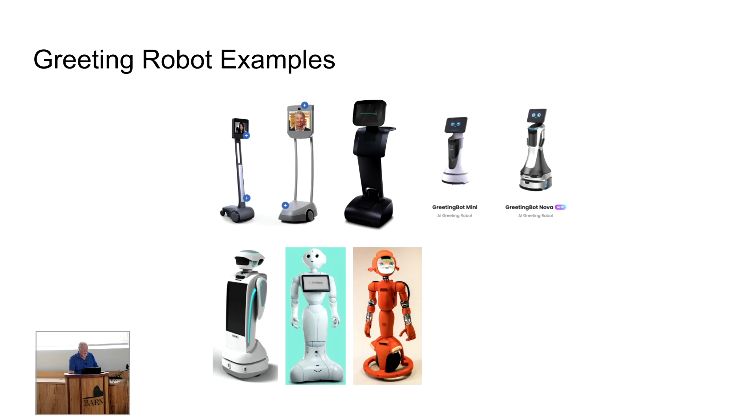Just to give you the feel, I have some videos, hopefully the audio works. I kept talking about this Texas project - let me scroll to the right place. Let's see if this works.

Multi-step task execution with fluent, human-like conversation. Our framework consists of a single AI agent derived from GPT-4, which is responsible for both natural...

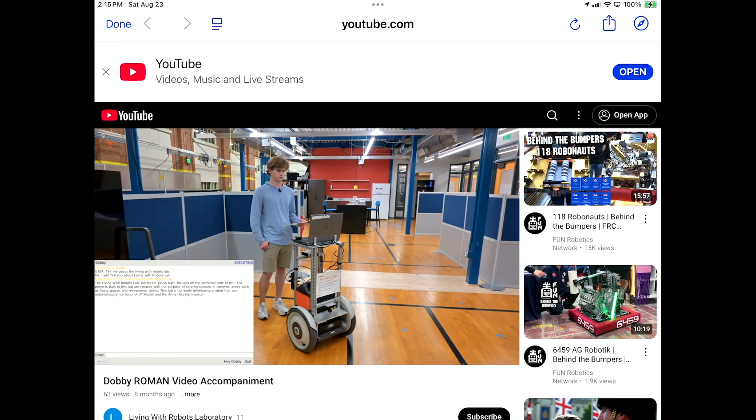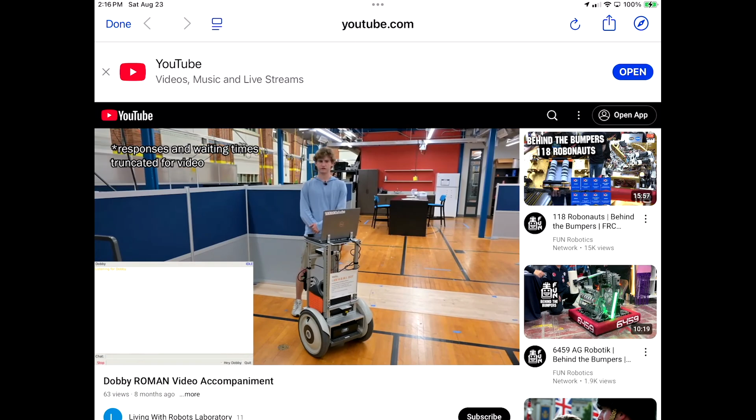People building robotics compete to see who has the better technology. You can imagine Amazon wanted robots to man their warehouses - able to go find, say, a fuzzy red doll for someone, put it in a bin, and bring it up so it can be shipped off. They set up a combination of cubicles with various objects, where the robot knew ahead of time what the objects were and how to grasp individual objects, but didn't know where they were located or where it had to put them.

So they would come into the contest and it says, okay, I want you to get these 5 items, put 2 of them in this bin and 3 of them in this bin over here. And they were timed. How fast can you complete this task?

So that was RoboCup. Then they came up with, and they said, that's interesting for industry and everything else. Then they came up with RoboCup at Home, which is the one that Connor mentioned, and the one that Justin Hart's students are most interested in. And these are doing things in the home.

Like they want to be able to say, a robot walks up to the front door of your house, and you're going to say, make me a cup of coffee, right? So it's got to figure out, a cup of coffee, got to find the kitchen, got to find coffee, got to find the coffee cup, got to find the coffee maker, got to make coffee.

Yeah, sight unseen, never seen your house. So this is where I come from. Connie, kids, everyone, I say, I want a robot. I can say, make me a drink, make me a gin and tonic. And it figures that out, figures out what the gin is, figures out the tonic, glass, ice, the whole thing, and brings it to me as well. That's my ultimate goal to get there.

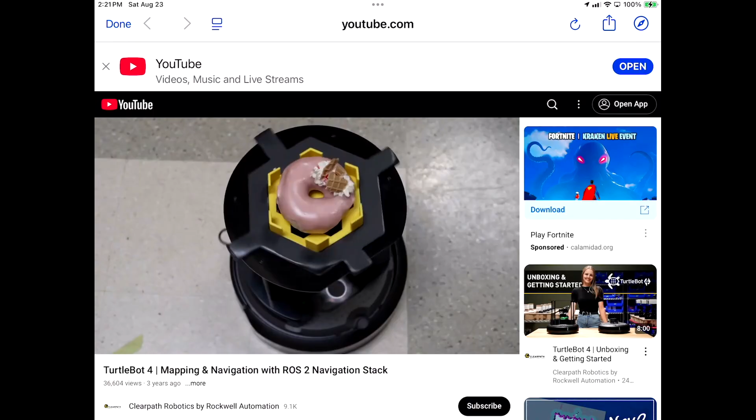So before we begin, if you're new to TurtleBot 4, make sure to check out our previous tutorial and we'll walk you through all the steps to get set up with your new robot. Otherwise, today we are using our TurtleBot 4 standard model as it's got this mounting platform.

For which we've designed TurtleBot 4. Make sure to check out our previous tutorial, which will walk you through all the steps to get set up with your new robot. Today we 3D printed a donut holder device that snaps right onto the top.

If you are looking for the design files for this, they will be linked in the description below. We've also got a computer running a Linux environment, as well as a package of a half dozen donuts from our favorite local donut shop, Lady Glaze.

Now that our robot's turned on, we're going to launch our SLAM toolbox, and we'll do that by opening a new terminal and running this line of code.

SLAM will allow our robot to create a map as well as localize itself within a map at the same time. There are two different kinds of SLAM supported by the TurtleBot 4: synchronous and asynchronous. Today we're using synchronous SLAM, which uses a bit more processing power, but helps create a better quality map overall.

After we've launched SLAM, we're going to open another new terminal and enter this line of code to launch RViz. RViz is a program that will allow us to view our robot as well as its location on our map when we're both generating the map and navigating today.

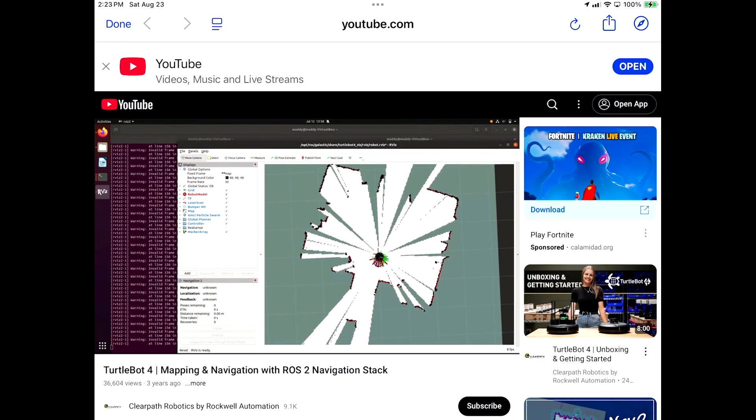Now we need to create a map of our environment for our TurtleBot 4 to navigate. To generate your map, you will need to place your TurtleBot on the ground and use your controller to drive it through your environment. You can monitor its completion by using RViz.

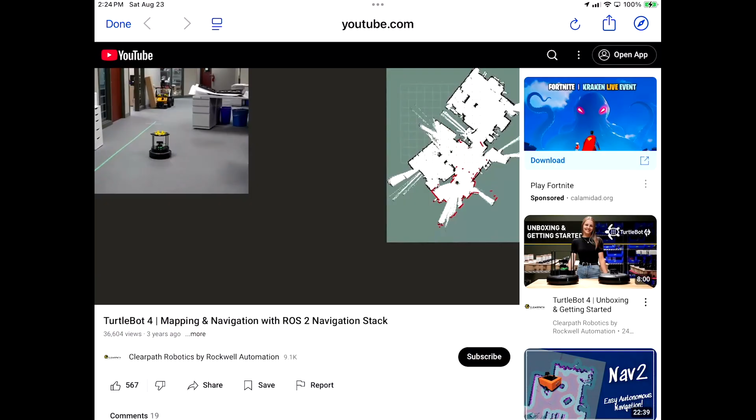Two important tips to consider: clear out any objects in the area that are below the lidar of the TurtleBot, as it's a 2D sensor and won't be able to see them. Also, try not to have anyone walking around while you're mapping, as they could show up on your map.

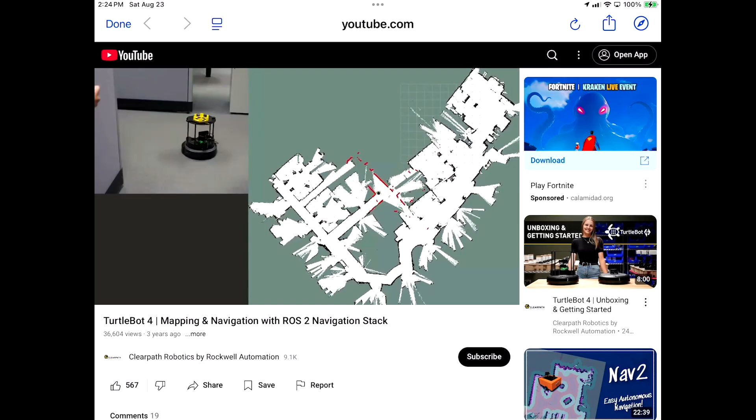Yep, it runs with the LiDAR and it'll map your thing out. And the interesting thing is you can see it building its map of the whole floor over here. She's going to come along later and label where everyone's office is, so that when she gets the command, the TurtleBot can take this donut. The LiDAR scans through 360 degrees and can detect objects up to a range of 12 meters. The red marks on the map indicate objects. Now that our map has been created, we will save it by running the following line of code. Once the map is saved, it will generate an image file with a naming convention. So Connie and I are down in Austin, and they have the driverless cars down there—they've had them for three years or so, and they're all the Waymo ones. They're Jaguars, nice cars, but they have this spinning thing on top, and two spinning things in the front as well, and those are the LiDAR—basically radar that senses where things are around them. Tesla is introducing driverless cars, and he's not using LiDAR on any of those—he's just using cameras. Some folks say you really need both; if one fails, you want a backup. So I'm curious to watch how the Tesla rollout goes. Cameras can be integrated into the body. Yeah.

It's always good to give that file a check and make sure you've covered all the areas you want to navigate. Also, a file with this naming convention is created, which we will reference when setting up our navigation in the next step.

Now that we've saved our map, we can go ahead and create our donut delivery route. We'll do this by launching the ROS nav2 stack using this line of code. Just note to replace the map name in this line with the map name you saved in the previous step.

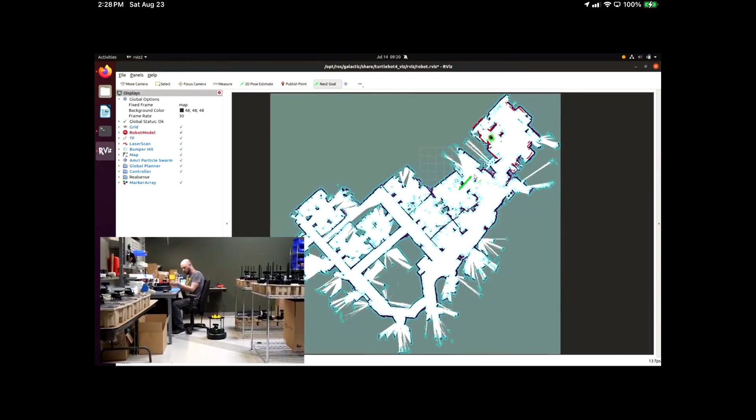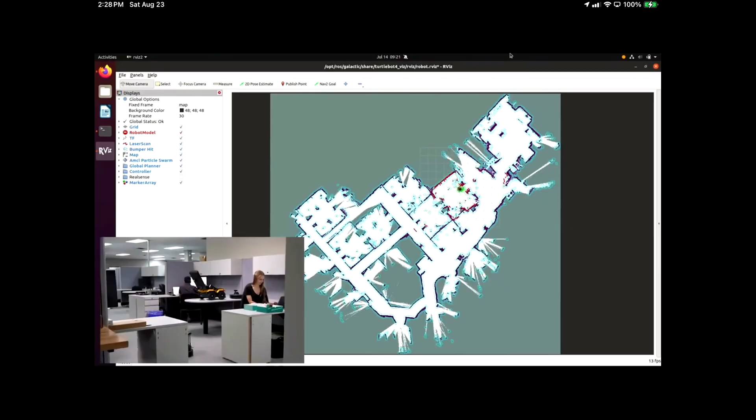And then after that, the robot knew, okay, here I am, I'm pointed this way. It figured out this path to get to Trevor's office through here. Okay, so that's probably more than one.

There's one more. So most of these you look at and they're like, wow, not very polished. This last one I have is from a company, Orion Star, and they're building these, and these get pretty expensive. But here, I'll show this one. I'll back it up right to the beginning.

It may change. We're going to use one of those turtle bots that you saw in that video with Maddie. Mount on top of it a monitor stand, like one of these on the side. And the idea is put a face on this thing and have it, for the canned video, have it actually mouth the words and maybe even get some eye tracking down as well.

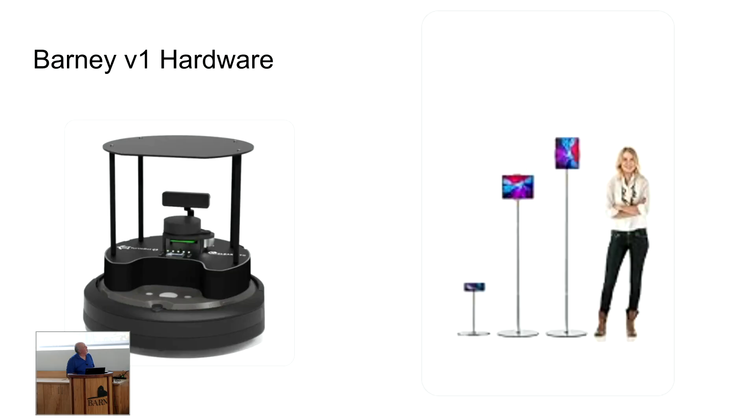Okay, so here is kind of the face, and there's a bunch of these websites you can go to, enter in a bunch of text, and they will basically animate a face with that text, where they move their mouth and blink their eyes and all that kind of thing. And I've actually done that so I can get people more of a face. But that's probably what we'll put on, running on that monitor over there on the right that we mount on top of the TurtleBot, okay?

So that's kind of V1, my proposal here. So the technology pieces here. This is where things will start getting more technical.

The ROS2, as I told you, is an operating system. And it introduces complexity. And I get asked the question a lot, well, why use it? Why not just not use ROS and just write everything in Python, you know? Well, so the reason they called it an operating system is because the people that built this, I think it was the University of California, wanted a platform. It's much like why you use Mac OS or Windows, right?

Those operating systems actually have the ability to have drivers that work with any keyboard, any mouse, any speaker, anything else, right? So think of it, if you're a developer writing a program, you don't want to change your program for every different type of mouse or keyboard or speaker or camera or everything else that's out there. You want to write to one platform and then have it work. Someone plugs in a new camera you've never seen, should work. That's the idea with ROS, right?

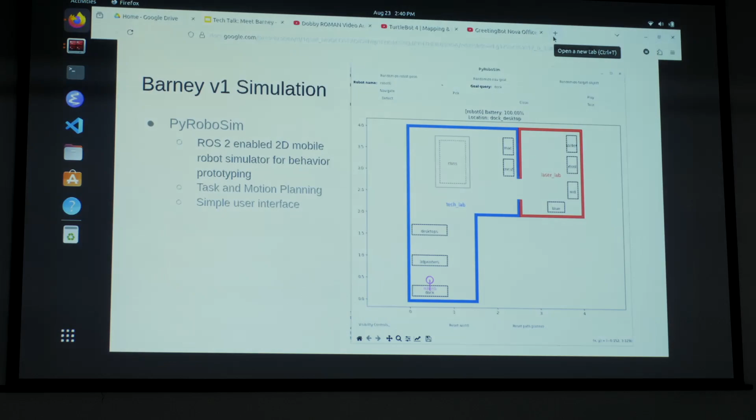I actually have this running on Linux. This is an Ubuntu ThinkPad, a Lenovo ThinkPad. I've built it so you can run this on Windows and, let's see if I can bring it up, on a Mac as well. But the best development platform, to tell you the truth, is running it on Linux because it has all the tools. If you were software people, I'd go into why we use Docker, a virtualization software. If you were running on Windows, we'd actually use Windows Subsystem for Linux. I'm not planning on it, but we still virtualize the Python environment. So there are some differences on these platforms that you have to account for, but probably only a handful of people are interested in that.

So let me skip to actually running the simulator. Let's see here - this is running under ROS 2. And so it brings up something that looks very similar to that slide I showed you here, right?

And there's our robot. With this interface, you can randomize the pose where the robot starts at - like it moved all the way over here. You can also randomize its nav goal - like I have class right here, so it chose the query goal. If I click navigate, it's going to move from here over to the class station, if you will. It's going to build a path and whatnot.

Now, you notice it doesn't take what looks like an optimal path here. So this is a planner. I told it, here's where the robot is, here's where the class is, and then it had to figure out how to get from where the robot is stationed, next to red over there, to class. It's using a planner that is more, what I call, greedy - it tries to find the first path it can, not an optimal path. If it tried to find an optimal path, you'd see how it took that little hook out there - it probably would have smoothed that off and cut it. So that's additional work that has to happen. We could do a better job on the planner.

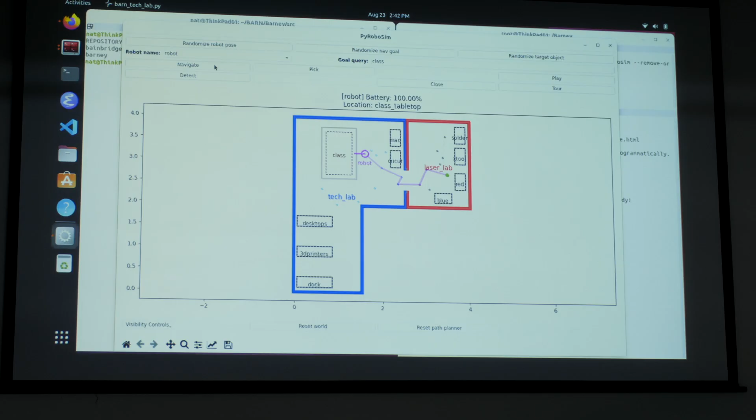So what would make it do that random detour? Well, it depends. When it's trying to find a path, it's doing this fan out, and you can see it probably got to that first point and started fanning out. These things are running on their own, and it said, oh okay, I can still see the class, I can get there from this point - but it doesn't realize that's not the fastest point. So in computer science, it's doing more depth-first than breadth-first - it's waiting for the first path, and that's the first path it finds.

Yes, no, I used one of his. And I'm planning on changing it so it doesn't do random walks like that, which won't be too difficult. He did the basic stuff, and he expects other people to plug in their own planners.

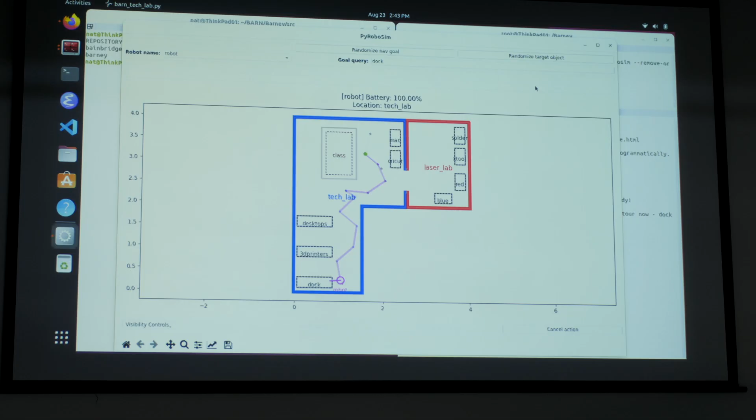Correct. So I have another tour button in this as well - you can see this tour button where it starts down at the dock. It's going to find out how to get back to the dock down here. And then we have this play button.

So I've added a bunch of videos to the tech lab at the barn.

My name is Barney. I am a greeting robot that can give you a tour. The tech lab is home base for a growing community of makers. You'll find equipment for 3D printing, laser cutting and etching, circuitry, robotics, drones, CNC programming, and coding. It's an ideal environment in which to experiment, create, and spur your imagination. Would you like to take a tour now?

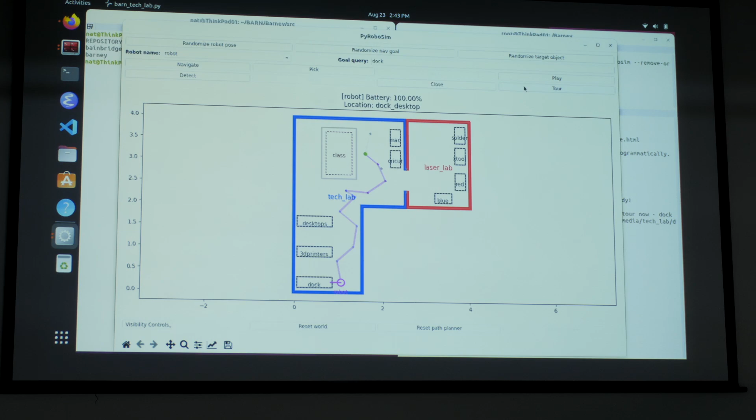So I've created videos for each one of those stations. When you take the next step in the tour, it goes to the 3D printers, you can hit play again, and it'll start talking to you about 3D printers. So this is what would be running on that monitor mounted on top of the TurtleBot. And I'm going to kill this now - so I've created videos for each one of those.

That's fairly primitive. I pulled most of the content and wrote most of it because I know the tech lab. I don't think I could do that for a lot of the other jewelry studio, fiber studio, and everything else. I'd have to have people do it. But it's kind of simple and not as exciting, right?

And this is the same problem at University of Texas. First of all, we want a little bit more humor in this thing, make it a little more natural. And plus, for the tech lab, like when you're introducing a 3D printer, we want to show things that have been 3D printed. You may even want to show something being 3D printed as it's there, so that people get used to this as well.

So what's the significance of the code on the right? That's actually what's spitting out, and you see I have some audio overruns. That's an error message. But it's basically spitting out what it's trying to do. If you read through this, navigating to class, remember when it went from its place?

So that's the first thing. And then you keep reading through this. Take the next step in the tour, which is the dock. That's the first one. Take the next step in the tour, which is the 3D printers. So it's just printing out diagnostics.

What was the input to the sim? It looks like you've got Python script. Oh yeah, yes, I hand-coded the Python script that talks to the PyRoboSim API.

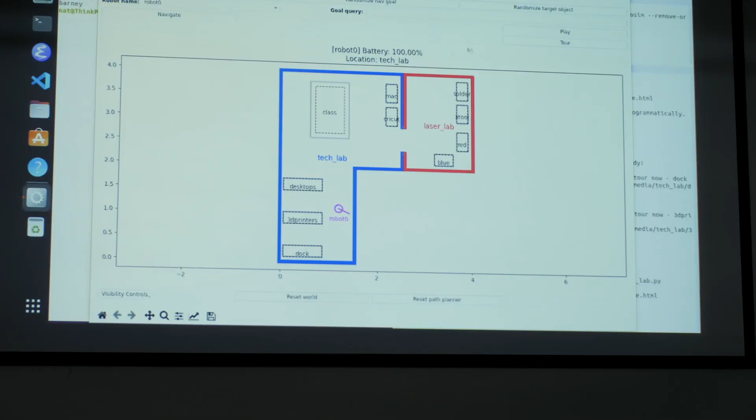So if I wanted to just run this Python 3 examples, barn, techlab.py, you'll see this will bring up the same kind of layout here. And now I'm not running with ROS, I'm just running on top of the PyRoboSim API. And I can do the same thing. I can take a tour here.

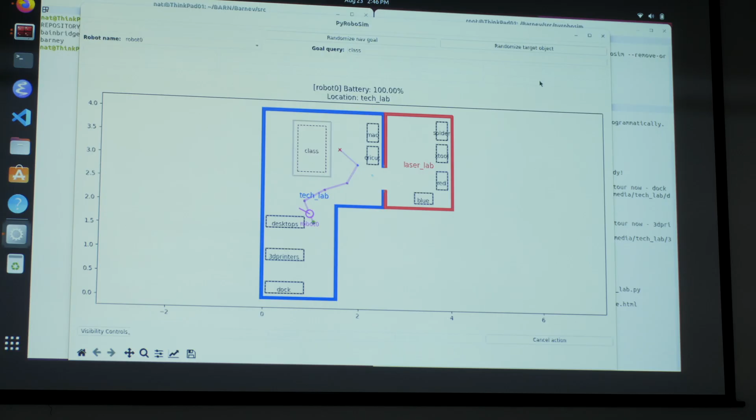So the idea is you can take the whole tour through this. Goes up to the 3D printers. It's basically going to go to all the stations, do a little blurb about them. Now the idea is, that's the canned video thing that Ray asked about.

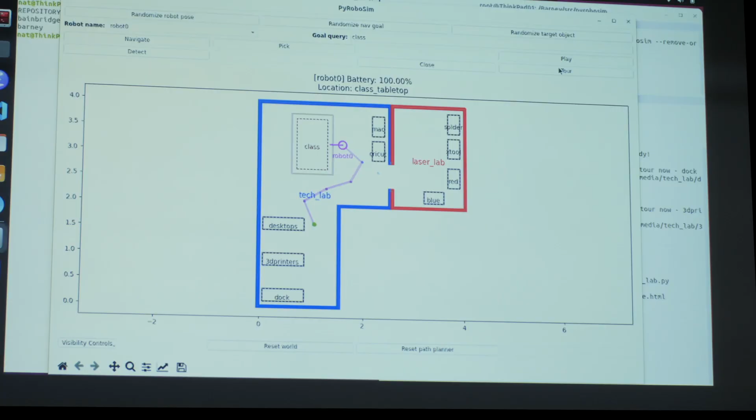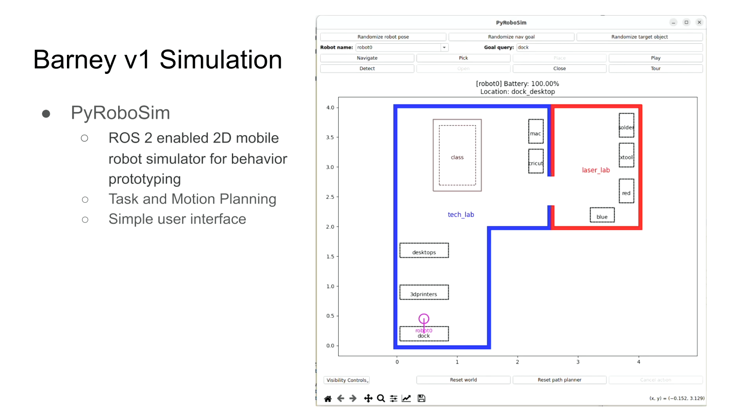The idea is this is going to be hooked up to a ChatGPT or some other large language model. And you'll be able to say, okay, I understand what you said about 3D printers, but I want to print X, what filament type should I use? Right, there will be questions we don't have canned answers for. And it's going to do a search on the internet saying, okay, the person wants to build a whistle on this 3D printer, what's the ideal filament that they should use. And hopefully answer that type of question.

So that's why at the end of each one of the videos, it says, any questions? And that's when the large language model will basically step in and say, okay, handle whatever questions you're going to get about the laser cutters, or the 3D printers, or the Cricut machines, or whatever you want. So this whole talk, that's my simulator up and running right now.

This whole talk was to engage other people in helping build this greeting robot. And you'd think, oh, they're all programmers now. Not necessarily, I very much want content people that can come up with ways for these videos that we present, the canned videos at each one of the stations. And I'm very much engaging with the people who give the tours, because they've been doing this for a couple of years or so. And then also with each one of the studio people to say, how can we get people engaged?

Like in the tech lab, I'd like the robot to be able to actually start a 3D printing job when he starts the tour, right, and then goes off and tours the other pieces, then comes back, something very simple obviously, and says, oh, here's your little badge that's been 3D printed. Or do it on a laser cutter, like Doug cuts out medals for the jogging thing. That would be very much a thing we could kick off on the laser cutter, cut one medal, and then you could see it happening and then come away with something as well. I think you could do like one of those. I don't know if you could do like 5 of those at the same time.

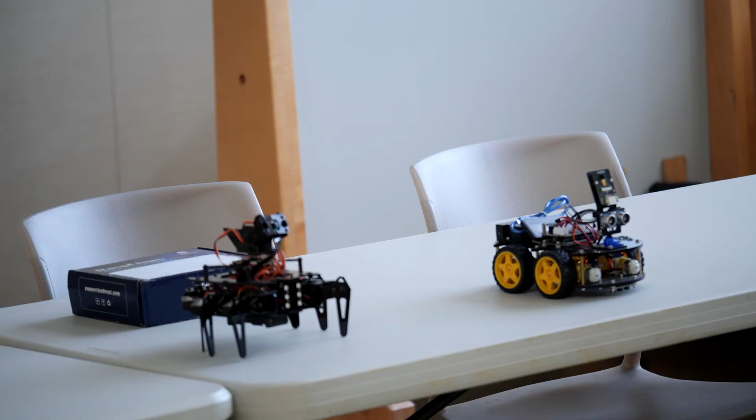And we got it to walk around the tech lab, and I used everything we talked about. I wrote that program, the PyRoboSim. I could use the ROS2 PyRoboSim and run that code on that physical robot, and physically get it to walk around the tech lab without changing a line of code, from moving it from the GUI simulator to the actual physical robot.

Give a spider, give a tour? I think that's too low of a bar. First of all, you know how long those last on battery, and there's no way to get it to dock itself. We've got to get that. No one will charge the thing long enough if you don't solve the docking problem.

There's actually packages that do this, and you've got to give it a model, right? It needs to understand, like in the Speedway scenario, it knows the layout of UT. So you say, okay, I want you to get from the Welch building to the Bill Gates computer science building. It says, okay, I'm here at the Welch building, there's the Bill Gates building, and then it's gonna try to walk and go through Speedway. It's gotta say, okay, there's gonna be people in my way, there's gonna be scooters, there's gonna be e-bikes, and it's gonna try to navigate its way. There's software that knows how to take the input from cameras, recognize things, and avoid them as well.

Correct. Actually, not a replacement, it's an addition. You still need the plan. You need the plan for how to get from Welch to Gates.